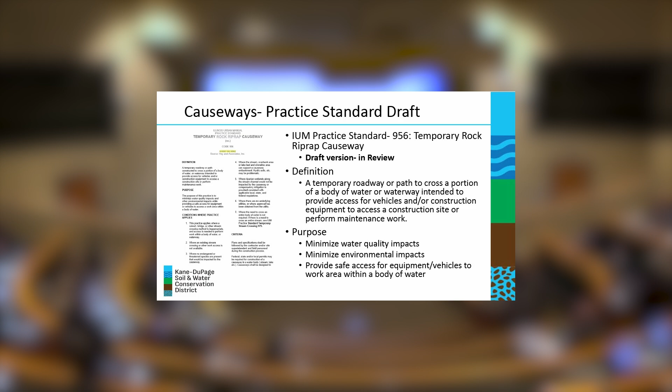So looking at Causeways, the way that it's set up at the moment, our draft standard would be 956 for temporary rock riprap causeway. So what is it? It's a temporary roadway or path to cross a portion of a body of water or waterway that's intended to provide access for vehicles or construction equipment, accessing a construction site, performing maintenance work. Essentially, the major reason for a causeway is to minimize water quality impacts, minimize environmental impacts, and provide safe access for any equipment in a work area that's within a water body.

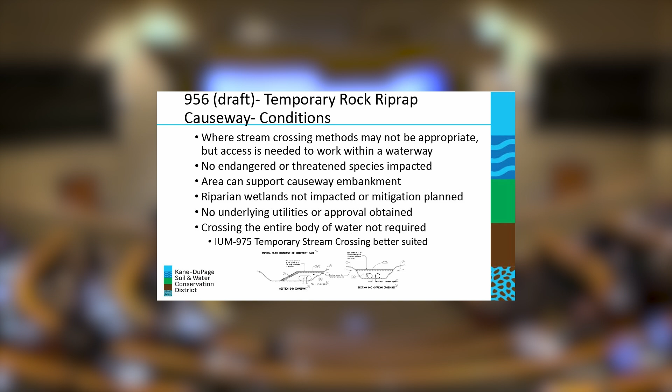So using a causeway, some conditions you want to keep in mind. It may not always be the best option. They should only be used where a culvert, bridge, or other stream crossing may not be the best option for work, but work is still needed within the waterway. It should only be used in areas where endangered or threatened species are not going to be impacted. The stream, overbank, or lake bed should be able to support the causeway, so looking into hydric soils or other soils that may not be able to hold would be important.

Also looking for underlying utilities, making sure that you have approval prior to that. Also, if you're looking to completely cross a waterway, that may not necessarily be the proper practice, so the temporary stream crossing standard may be a better option in that situation.

So some of the criteria for causeway use: remember that permits very well may be required for any construction of a causeway. Design is going to be extremely important, so they should be designed to withstand any high flows, ice, overtopping, other factors, and equipment loads that would be working on the causeway. Design should be intended not to cause any erosion or damage to the stream banks, and not to cause any increase in water flow or depth from increases in water surface profiles.

So where it's feasible, location of the causeway should be selected where erosion potential is going to be lowest. You want to do that by evaluating the channel geometry, the slopes, and the stability. Width of the causeway should be sized appropriately, both for access and stability, as well as addressing any potential aquatic impacts to the environment.

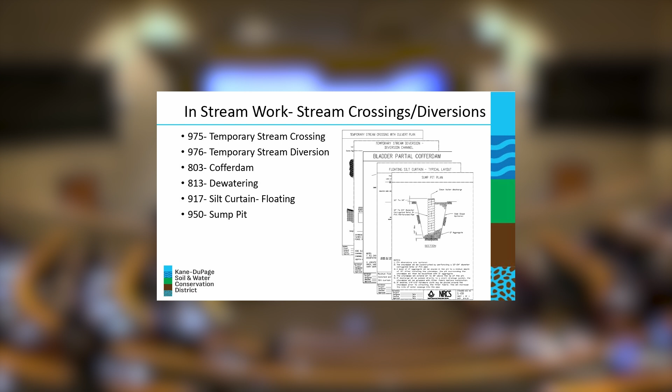So some additional in-stream work standards that you may see. These are all the active ones that are up on the Illinois Urban Manual website. They may be utilized in conjunction or occurring simultaneously during any potential in-stream work or any causeway work that may be going on, in order to reduce any pollution or sedimentation potential and stay in compliance.

So if you were at last year's seminar, we went in depth on in-stream plans and dewatering plans specifically. That is up on YouTube too, so if you want to take a deep dive on some of those, feel free to go back to the website and check that out. But essentially, looking for different resources and standards to remain compliant and responsible in development is absolutely necessary moving forward.

So moving to the next couple presentations, we're going to focus a little bit more on the permitting side, specific permits, what may be needed, and what specific type of work you may be able to do under those. So properly planning, implementing, maintaining, and removing practices are going to help protect workers, help protect the surrounding environment and the resources that we have.

So if anybody here is interested in the development or the review of any practice standards in the Illinois Urban Manual, feel free to reach out to us. We do have a couple of copies of the draft version of the Causeway practice standard right now. So if you want a copy of that, just find me after. If not, you can send an email to us and we'll be able to reach out if you're interested in looking at that and reviewing the language.

Other than that, are there any questions before we move on to the next portion of the presentation? All right, if not, then we'll move on, and I think we've got Patrick Verhalen from the Army Corps of Engineers, who is going to be talking about some things going on in his neck of the woods.

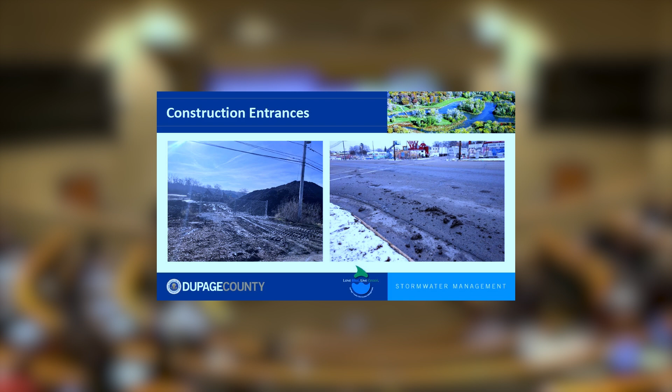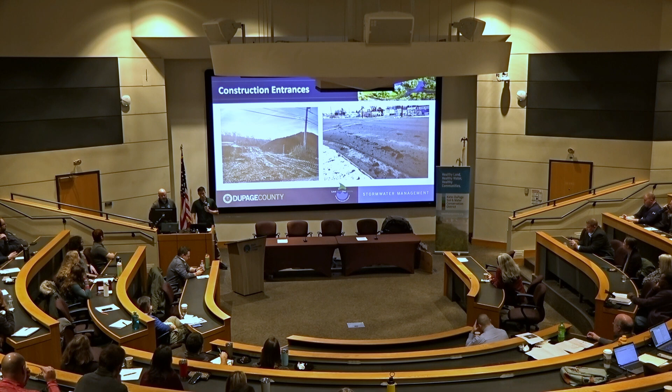So, why talk about construction entrances? It's the most commonly complained about sediment erosion control issue, mostly because that's the most visible to the public. It also can cause soil to run into different storm drains and cause sedimentation that way, but mostly it just ends up being a public nuisance and safety issue. So here's general specs from the urban manual.

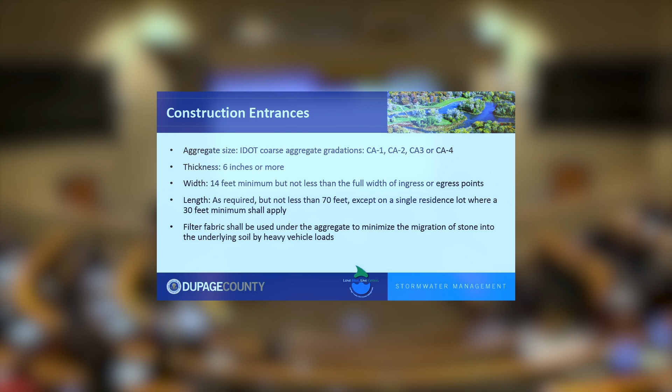For DuPage County in particular, the things that we see wrong most is the construction entrances tend to be capped before they're supposed to be. The point of a construction entrance is to essentially vibrate the tires to kick off the sediment. So when you cap it early, what tends to happen is the soil will stick to your tires and not be able to flow off.

Another issue we see is we regulate unincorporated predominantly. So what you end up seeing is ditches throughout the county. When you put a construction entrance down, if you do not allow water to flow underneath it, it ends up damming the water, causing issues that way, either the water flows over the top and/or floods your neighbors. Another common issue is we see the construction entrances aren't long enough.

So here you can see they're supposed to be 70 feet on a large construction project. If you're working just a single family or teardown lot, it's supposed to be 30 feet. When you don't put fabric underneath, the tires will immediately sink in, essentially rendering your construction entrance moot. Here's an example of a good construction entrance.

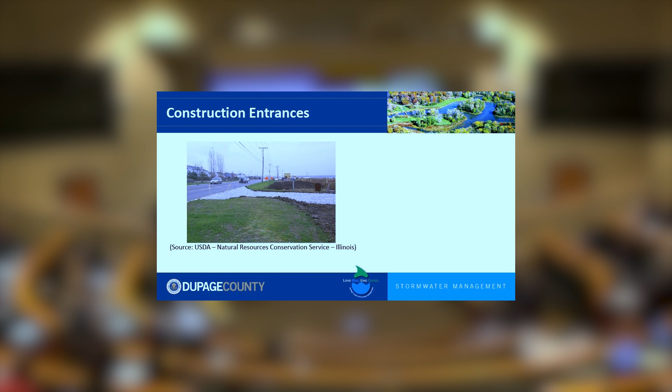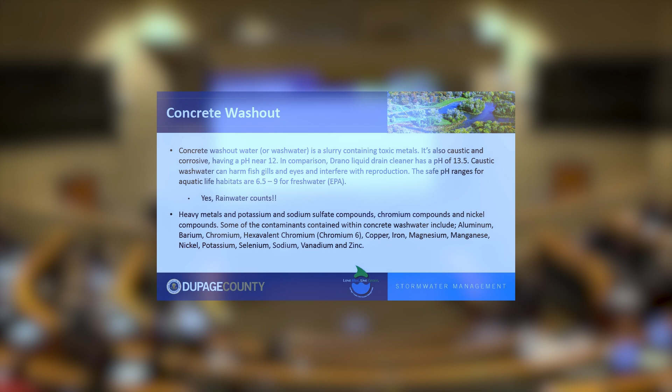So concrete washout, why do we care? Concrete washout has a very high pH, which can cause issues in fish. Not only that, it has very heavy metals, arsenic, lead. So we tend to care quite a bit about this. And yes, rainwater counts. Concrete washout itself is the mixture of the concrete slurry with water. So when it mixes with rainwater, essentially, all you're doing is just creating more washout.

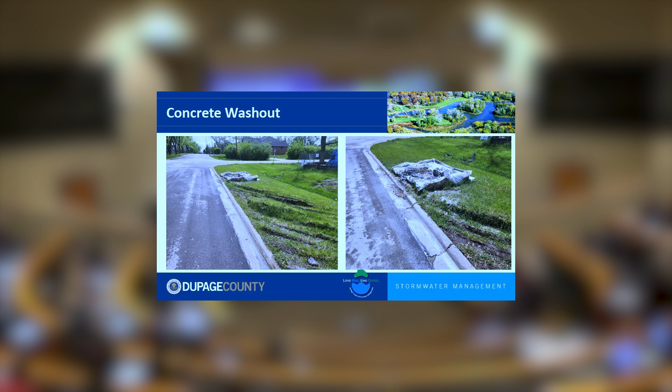So here's an example I saw fairly recently. When we're talking about individual takedown lots, it tends to be an issue of spacing. We tend to see a lot of plastic liners with 2x4s, and just for easy access, people will tend to put it, as you can see, towards the front of their lot. The issue with this is the capacity is not high enough when you have multiple construction trucks driving in. The other issue is how close it is to the curb. In this picture, this ended up flowing right into an inlet.

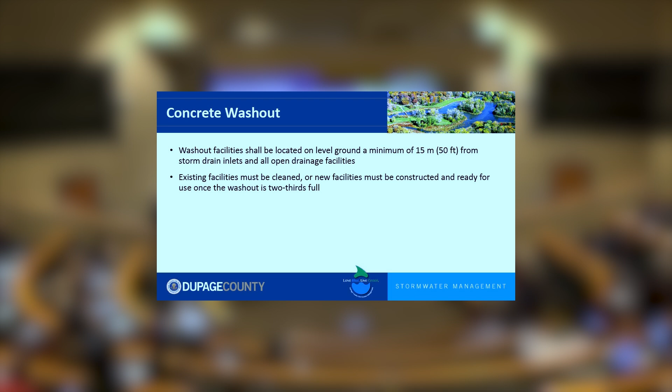So what are we looking for? Ideally, your washout will be at least 50 feet from an inlet. This isn't always feasible in all locations. So when you are drawing your plan, since it seems like a lot of engineers are here, you need to be mindful of where the water will flow from. When you're putting it on a small takedown lot, maybe put it closer to the foundation of the house, keep it more away from the curbs and the ditches.

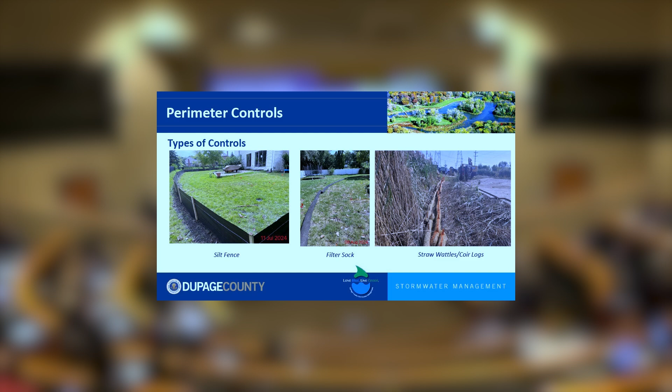So I'm going to talk about perimeter controls. We were talking about siting and how we would permit and inspect a site when we're out on a site. Along with the concrete washouts and rock construction entrances, we're going to be looking at perimeter controls. There are three main types of perimeter controls that we deal with at DuPage County. Silt fence is one. You can see here that this one is installed well, except it's upside down with the line there. Filter socks are another one that we see often, and then a third one that we see often are straw wattles.

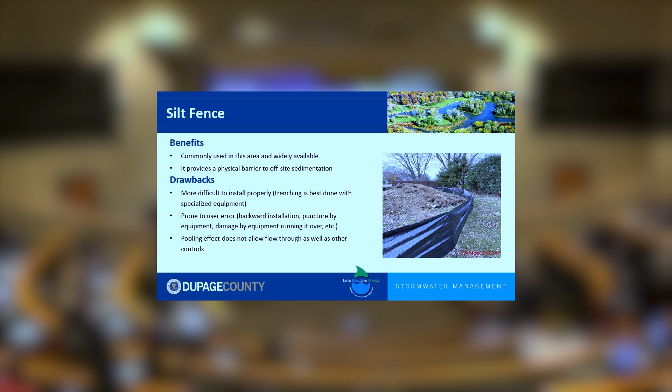Silt fences have some benefits and some drawbacks, like all BMPs. One of the benefits is it's used, so a lot of people know what it is and where to get it, so it's widely available. It does provide a physical barrier to off-site sedimentation. A drawback is that it is more difficult to install properly. Its trenching is best done with specialized equipment.

You can see this one on the screen. They didn't trench it, so no protection. So it's prone to user error: installed backwards, punctured by equipment, run over by equipment, you name it, blown away by the wind, knocked over by snow, just about anything can happen. It does not flow through as well as other controls, so there can be a pooling effect where you get water build up behind it, and so it doesn't become quite as effective.

Straw wattles are another one. They're functionally in between silt fence and filter socks. They're also easy to install. They provide some sediment filtering capability. They have a high flow-through rate. They maintain their function when damaged, and they can be biodegradable and eventually will decompose into the soil if you get the right kind. One of the drawbacks is that, just the same as a silt sock, if they're improperly installed, they're not going to work properly, just like any BMP, I suppose.

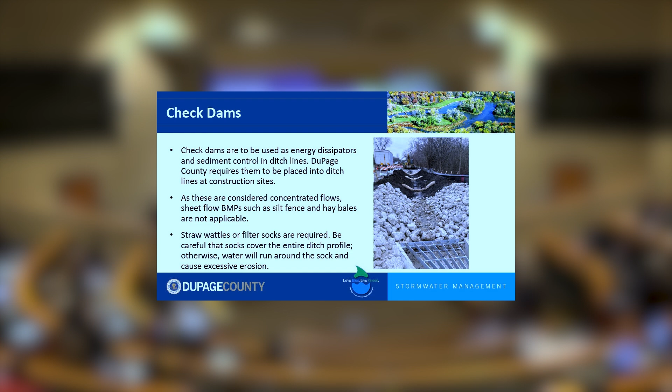Another thing that we see on plans and sites are check dams. They're used as energy dissipators and sediment control on ditch lines. DuPage County does require them to be used at all construction sites in ditch lines. As they're considered concentrated flows in these ditch lines, we do not allow sheet flow BMPs such as silt fence. We don't allow hay bales in any circumstances as a BMP. We do require straw wattles or filter socks.

Be careful that the socks cover the entire profile of the ditch. You can see here these don't cover the entire profile of the ditch. Otherwise, water can run around the sock and can cause excessive erosion. So other than the fact that they're not quite long enough, that's a pretty good example.

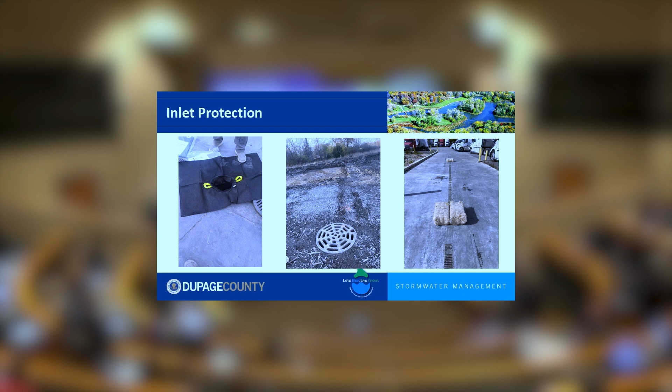So, inlet protection. Something that gets commonly overlooked is that inlet protection should always be combined with another form of protection. You'll see in a picture coming up here, the middle picture. So even with an inlet basket, which I don't believe this one had, all of the sediment would quickly overrun the inlet basket. So you want to combine different forms of protection. You could have a silt sock around it. You could have erosion control blanket installed around it with a high flow silt fence, as an example.

Again, you need to be aware of the size of the inlet. Using the wrong size protection will render it ineffective. And then something we see still to this day: fabric and hay bales over an inlet does not count as protection. On that right picture, you can see someone went to Joann Fabric, got some nice hay bales, probably for $8, still had the plastic around it. We still see this to this day.

So just make sure you're installing an approved inlet protection. The other issue with that is the trench drain. The water would still go around it regardless. And then just make sure when you're submitting your plans, you show the specs and the multiple forms of protection.

One area that we deal with a lot are special management areas, and special management areas are wetlands, buffers, or floodplains. When we're talking about erosion control in special management areas, we do require a double row of perimeter control, including high visibility fencing. One of the concerns that we have in these areas would be trenching if you're dealing with sensitive areas, sensitive plants, even trees, that when you're trenching, you can trench through the roots or damage the vegetation.

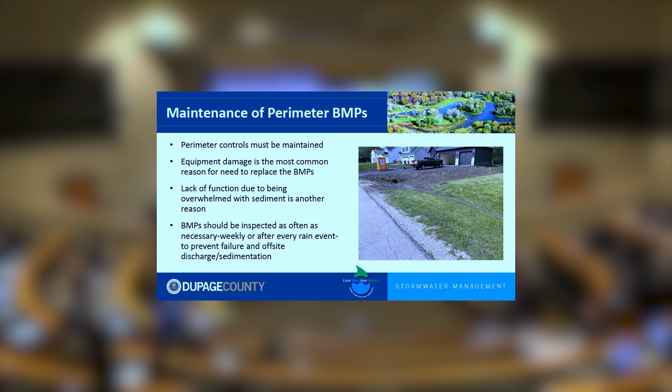So the last 2 things to discuss will be maintenance of perimeter BMPs and stabilization. Obviously, we need to maintain all of our controls. Talked about that in the very first topic. Equipment damage is the most common reason for the need to replace BMPs. Lack of function due to being overwhelmed with sediment or damaged by other natural things like rainwater and ice and snow is another reason. So we should inspect our BMPs as often as necessary, weekly or after every rainfall event, to prevent failure and off-site discharge or sedimentation. This site you can see here was actually awaiting the final stabilization. So they took their controls down, and then we had a big rain and had a nice off-site discharge. So even on a small site, it can have a bigger impact. On larger sites, the impact can be much larger and more disastrous.

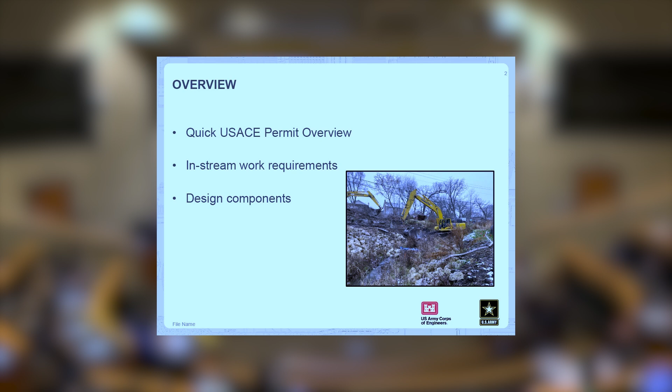Talk about some in-stream work requirements. I know last year I presented as well and went through our conditions. I'm not going to go through as much in detail, but I do want to talk about a few things that we are looking at more strenuously moving forward, and then highlight a couple of things as recommendations for where to go to get some inspiration and design requirements for working in water.

We have 3 main permits that we issue under Section 404 of the Clean Water Act and Section 10 of the Rivers and Harbors Act. Individual or standard permits, which are for larger impacts. It's a lot more in-depth review. We have regional general permits, which are mild permit review. They're not quite an individual, but they're not quite a quick, yes, you can do this nationwide permit. I think we have 3 or 4 that the Chicago District uses that are valid in the state of Illinois.

One of them is for transportation projects where you have impacts between a ½ acre and an acre. Shoreline activities for piers, docks, boat houses on the Chain of Lakes and other larger water bodies that we regulate, and then Lake Michigan projects for stone revetments, protection. What else do we do? I don't think we do any piers along there.

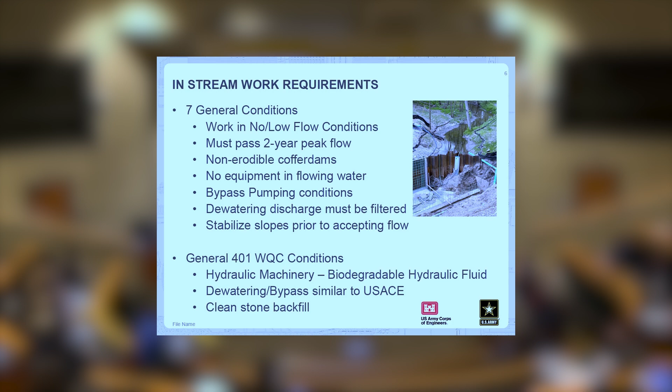All right, so last year I went over our seven general conditions for in-stream work. Basically, we don't allow work in high flow conditions. We wanted either no flow or low flow. Your work site must pass the 2-year peak flow. If you have everything set up appropriately, we have a big storm, and all of that gets washed out, we will not hold that against you. We won't say you're in non-compliance because you were compliant. You were doing what you could to keep those waters out of your site.

If you need to isolate from flowing water, cofferdams must be made of a non-erodible material constructed from the upland and then set into the water. No equipment in flowing water. There have been a couple requests where we've worked with the applicant. They've had an individual 401 water quality certification, where we are allowing a skid steer to drive from their access point through the water to get to their site to remove some debris. But those also have to follow the individual or the general water quality certification, where the hydraulic machinery has biodegradable hydraulic fluid, and those machines are washed before and after entering the water.

There's also conditions regarding bypass pumping. So if you are completely closing off a stream and you're pumping around it, that discharge needs to be on a stabilized surface but does not have to go through a filter bag. I think I talked last year about one of the in-stream work plans I had. They were trying to use two 8-inch pumps and pump them through a filter bag that's not equipped to handle 3,500 gallons per minute. If you're dewatering a site, that discharge must be filtered. And not just in a filter bag. If you're mucking around and dewatering at the same time, a filter bag is not enough to remove suspended clays before discharging. Stabilize slopes prior to accepting flow.

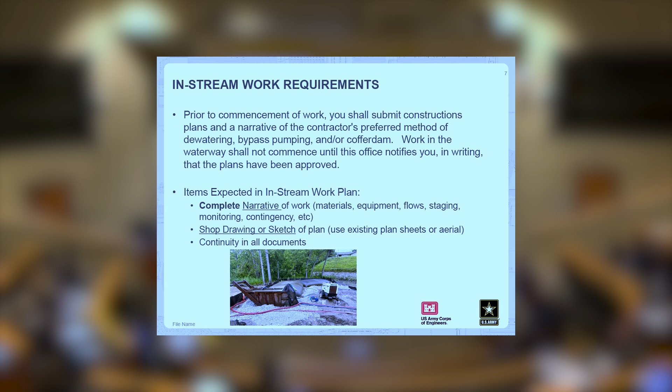We'll also include the statement that prior to commencement of work, you'll submit those construction plans and narratives of the contractor's preferred method. So this is if you don't have a dewatering plan in your actual construction documents, and you're pawning it off on the contractor.

The items we expect to see are a complete narrative of the work. What items are you using? What materials? What specifications? What your expected flows are? When you put those materials in the water, are you causing flooding upstream? Are you backing up the water?

Monitoring requirements. So once you install your system, how are you going to keep a check to make sure it's working? We want to know that because we have several contractors where they've put their pumps down, they pump it through a bag, and then they just walk away. They don't care. And then we come out there and the bag's full of sediment. It's just about to blow, and then they've got bigger issues. So we want to know what that contractor is doing to actually monitor it.

Then shop drawings or a sketch. And those documents have to marry up to one another. We want to know that what you're saying you're going to do and what you're showing us you're going to do are the same thing.

I'm also the IDOT POC. I've permitted several projects with IDOT, and I have a feeling I'm going to have a lot more coming up. And one of the things I'm trying to work with them is to put in-stream work plans in the actual construction drawings. This is not means and methods. This is another erosion control measure, or BMP, that should be included in the plans.

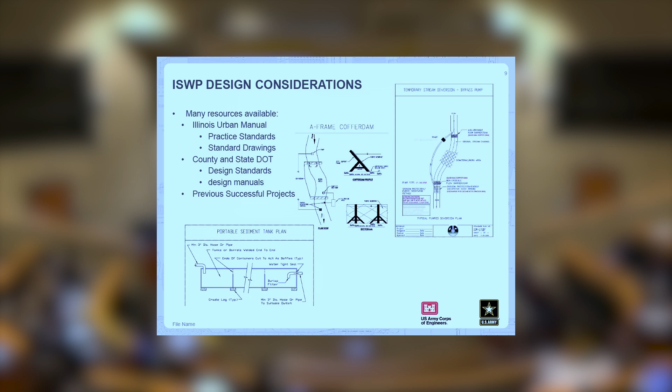There's many resources available. As Tommy was highlighting, the A-frame cofferdam, or draft causeway practice standard. There's several others in the urban manual. We highly recommend those. That's one of the minimum standards that we also refer back to periodically. As we saw in the survey before I started, a lot of you are using county and state DOT standards and design manuals and other successful projects.

I was looking back at a couple of different things in preparing this, and I went back to the Long Meadow Parkway causeway plans, and those were detailed. The specifications in the engineering documents had 4 pages outlining the requirements for dewatering. Those are the things we like to see ahead of time because that makes our job easier and can turn permits around faster.

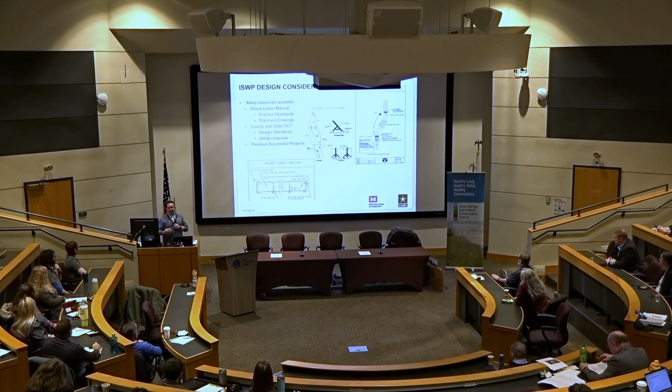Jamie. You mentioned planning ahead when you apply for stuff, and we know there's a backlog, and completely respect and appreciate that. Do you have a recommendation of how long you should apply in advance? I mean, with grant funds and things like that, 2 years might not even be possible. So what tips can you give us to help us prep for that? So, not waiting till 2 months before construction is best.

It depends on how involved the project is. I mean, we're doing our best to try and get them out as quickly as possible. If the application is incomplete, it's going to take longer because then there's more of a back and forth. For more simple projects, I recommend 6 months.

A lot of the permitting I've been doing with IDOT is in phase 1, so you're still 1.5 years, 2 years out to construction, possibly. So those usually are still a quicker turnaround, but yeah, at least 6 months. If you have a hard and fast deadline, even if you just contact us and say, hey, we have this coming, can we talk through it?

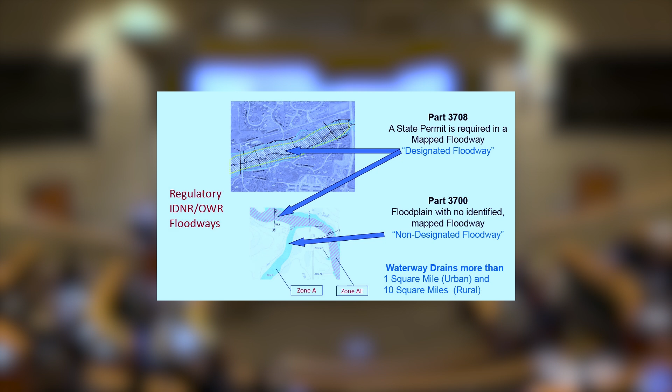Okay, what's a floodway? We think of floodways in two ways. One that is what's called a designated floodway, which we'll show a slide on how that's actually done, and then something which is a non-designated floodway. So non-designated just means there's no floodway defined within the floodplain itself. And generally, we only require permits for watersheds, the amount of water that is approaching your project through the channel, of 1 square mile for urban and 10 square miles for rural.

As you can see here, I don't know how to point here. Maybe the cursor. Can you see the cursor? No. Yeah, there it is, okay.

So this hatched area would be a designated floodway, and that would be predefined on the map itself. You'll see that in the oncoming slides. And we call that an engineered zone or an AE zone.

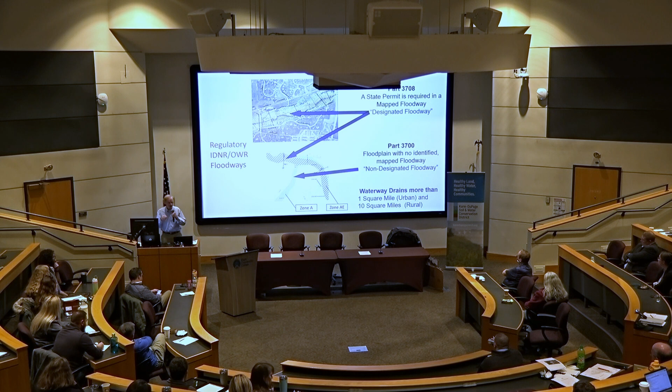And Zone A is still a waterway, but it wasn't put through a detailed study. It was more of an approximate study. So sometimes there's no base flood elevations associated with an A zone. In fact, A means approximate. So oftentimes there are none there.

Okay, so let's run through this. Here we go. Okay, whoa, what happened? What did I do? Okay, sorry.

So we're having a 100-year storm here, and boom, water goes up in the waterway. And that we would call the base flood elevation. Now, how you define a 100-year storm is up for some debate, and certainly with climate change, that's a moving target. But in general, in the Chicagoland area, somewhere around 7.5 to 8 inches of water in one day would be about a 100-year storm event.

So that's what's happened. So when we try to define a floodway, we have what's called surcharge, and then within Illinois, we have 90% of the storage area of the total cross-section. So let's just look at that. Let's just assume it's 0.1 feet. So what happens? Well, people start to develop because land near a waterway is very valuable. So this particular person just developed a little bit. Then it rains again. The water just goes up a little bit because there was only a small amount of encroachment. Now more encroachment occurs, maybe on both sides.

Whoops, I have to do that on both sides. Okay, and now you're up to the allowable level. Now remember, a floodway is defined ahead of time. This isn't just defined as people are filling in the side of the channel. A floodway is a defined exercise to locate this floodway area, or the area where the majority of the water has to be maintained so that upstream property owners won't be adversely impacted. On either side of the floodway, we call it the fringe.

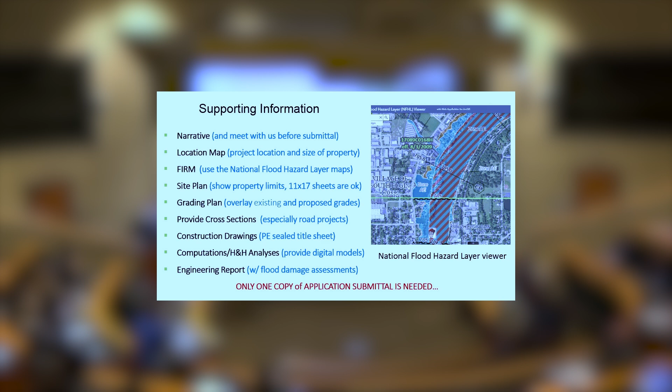Location map. If you take your map and your property and your project and put it on top of a FIRM, and you can get with the NFHL, National Flood Hazard Layer, which we'll talk about in a second, it's a wonderful site that gives you this level of detail where you can zoom in to the point where you can see cars and people. You can really get into the nitty-gritty of where your project is. Draw your project over top of that so we can see how it impacts the floodplain.

Within your narrative, give us the major roadways, the panel number. We'd like to know if it's a phased construction. That's helpful. Explain about the issue of upstream damages, because that can come into play. H&H, you're going to need to get the FEMA model. That's called the effective model, and then we can take a look at it, and how you're going to increase the accuracy of that model is also important. Again, we'll talk about that in a second.

Your storage calculations. Remember, we talked about 0 to 10 and 10 to 100; that's important for us to understand that you're maintaining how that waterway will react, because you're recreating the storage that you potentially have taken out. We don't need wetlands information. We worry about the quantity of the water, not the wetlands. The Army Corps handles a lot of the wetlands issues very well, and we work in tandem with them.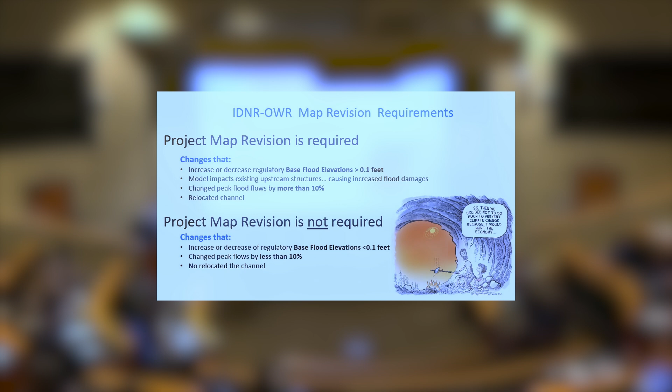And if you're increasing or decreasing flows by more than 10%, we would require a map revision. By the way, FEMA requires a map revision whether you're increasing or decreasing the flood elevations by 1/10 of a foot. And it's not required, obviously, for the same reasons. If you're less than 1/10 of a foot, then we do not require it.

So it's just amazing the amount of improvement that we've had in everything we do in everyday lives. I never even heard of a Slido. When I came here, I thought, oh, that's kind of a cool idea. So I have a lot to learn, too, about some of the newer features that are available to us on the web and how to move forward.

But this new map revision manual is much more helpful. Basically, it's going to start off with sort of an index of the whole thing. And it's going to give you a lot of background on FEMA and the map revision process. If you have any other questions about that, the CFM program gives you a lot of background about the NFIP, National Flood Insurance Program, and map revisions in general, how you read the maps and how you move forward with them. So that gives you some background there.

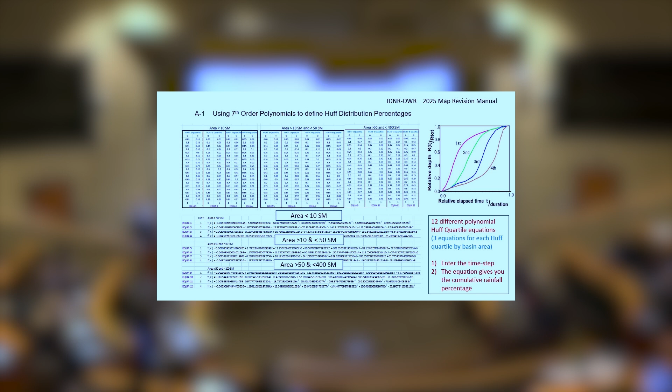Huff has 4 quartiles, first, second, third, and fourth, which are shown in that upper right drawing. And all they do is they're slightly front loading or back loading the intensity of a particular storm.

Okay, this is a little bit of a shout out to the Illinois State Water Survey. I review their work. I've been doing it for a couple years, and like, wow. Okay, for instance, to the left, you're going to see unstudied McDonough County. It's a rural county, I get it, but they studied something like 300 miles of unstudied waterway, and they did it in a fairly short amount of time by using LiDAR data.

So they have GIS people that can cut cross sections, and they come up with not just the BFE, but they have flows. So they're assigning, it's sort of a limited detailed study. That's what we used to call it for FEMA. And they did a great job on that.

Then Turtle Creek was a very contentious study. It's right at the border with Wisconsin, and this particular study has issues because there's a railroad that acts like a levee, but it's not a certified levee. So how you model that is dodgy, and it's not always that easy, but they came up with it, and then you have to get community buy-in, which they had some pretty intense meetings with them, with Rockford.

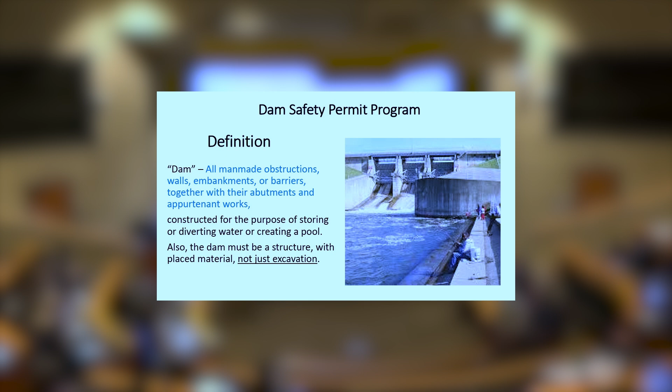Dam safety program, quick broad brush on this. We do have a dam safety program, and that really involves a couple things. We define a dam as a man-made obstruction, walls, embankments, barriers, together with their abutments and appurtenant works designed, constructed for the purpose of storing or diverting water or creating a pool. That's our definition of a dam.

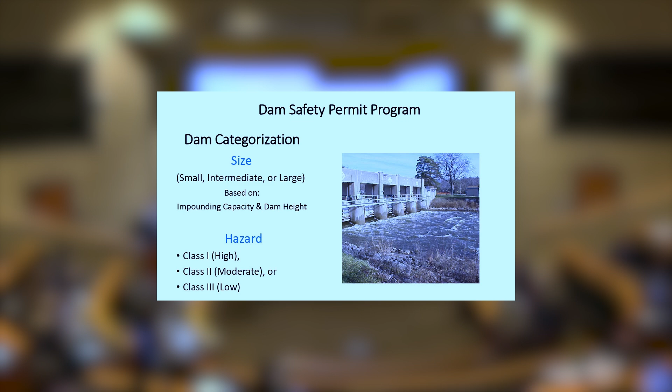It's not just excavation. We categorize dams by size and hazard. And reports are written, O&M, operation and maintenance reports are required for dams because it's very important to do that. So kind of, again, quickly going through this. What is the hazard classification? Class 1, 2, and 3. Class 1 would be high probability of loss of life, and I'll show you a picture of one, Lake in the Hills Dam, in a second.

And kind of almost comically, but not, they've reviewed that as: imagine a baby sleeping in the lower part of the house, maybe it's a basement, and if that water comes in to the point where that child could be drowned, we just simply classify it as loss of life. Then there's moderate loss of life and property damage, and then low probability would be no problem.

And then when do we require a permit? Well, there's 3 categories of when we require permits. One is the construction of a new dam, modification or removal of dams, which is kind of a program that we have now in the DNR. We're trying to remove as many dams as possible, and it's quite a battle on the Fox.

But we feel the removal of any dam is going to be way better for the environment, for fish migration, and many other issues. And those dams are dangerous. I mean, people have died in the boil downstream of that dam. So I don't get it. Why? Well, I do. People have gotten accustomed to those dams. They think they're pretty, and they think that they give them some great amenity. Well, there's other issues that would say that's simply not true.

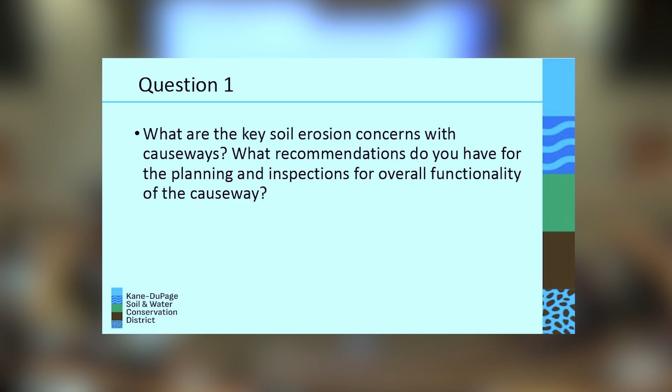But the first one we have is, what are some key erosion concerns with causeways, and then what recommendations would you have for planning and inspections for overall functions of causeways? And just feel free to jump in if you want. So yeah, I guess I can kind of take this one. This one has my name on it.

Coming from recent experience here, so we were the firm that did the Carpentersville Dam removal, worked with KDSWCD to develop the in-stream water management plan for that removal. Obviously, the main measure for that removal was a causeway. So, main concerns for erosion control around causeways, I would say that's going to basically be your means and methods around the installation and removal.

Once a causeway is set up correctly, it should pretty much function. You shouldn't really have any sedimentation, pluming, or anything like that. So it's really your means and methods on how you do your installation and your removal. So in terms of best methods for installation, obviously this is after all your careful planning, but let's say you selected the right size gradation, the right aggregate and all that stuff to make sure it's stable.

Your method for placing that causeway really dictates how much sediment you're kicking up and sending downstream during installation. And so what we found was the best method is basically your dump, spread, and drive out method. So, definitely keying that causeway into the bank where you're starting, so you're above your flood elevation, designed above your 2-year on the bank that you're starting at. You dump, you shape it, and then you basically drive out on it and dump again.